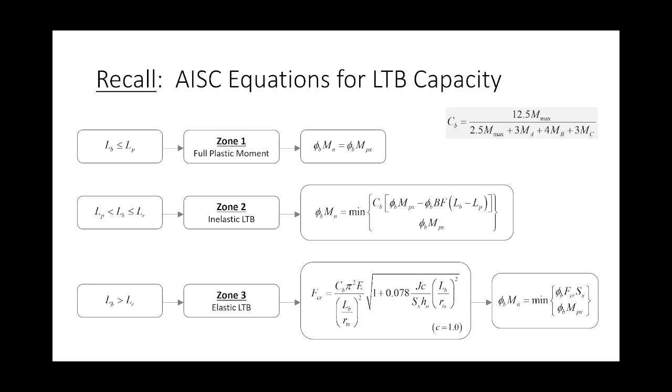But we only considered one. Why? Well, both segments had the same length, both segments had the same max moment, both segments had the same CB, right? So they performed the same way. With me so far? Now I want to talk about this problem, just to make sure that you're paying attention.

What about a beam like this? So each segment might have a different LB value. Each segment has a different CB value. Each segment has a different Mmax. So I propose that each of these segments is going to have a different capacity, different phi Mn.

So the way that you would handle this as an engineer is you would look at all of them. You would compute the Mmax for this segment, compare it to its phi Mn, the Mmax here, compare it to its phi Mn, and the Mmax here, compare it to this phi Mn. And the segment that governs is the one that has the largest efficiency, or the largest performance ratio, as we looked in our last example.

Now for shears, you just use the maximum shear overall, and for deflections, just use the maximum deflection across the entire beam. I just want you to know that the problem we did last time was simple because both segments were the same, and to be honest, we try and exploit symmetry whenever we can in real-life applications.

But it's possible that you don't have symmetry, in which case, take the one that has the largest efficiency. And the one that has the largest efficiency might not be the one that has the largest moment on it. In other words, you might plot the shear and moment diagram, and you might have a segment that has a lower moment than another, but the efficiency is higher because of the CB and the capacity and whatnot. Does that make sense? All right, I want to look at this problem.

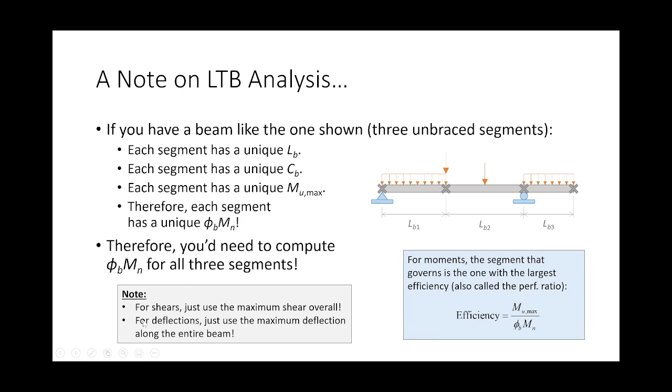Okay, and before we open up the calculations here, I'll open up the notebook, but I want to make a point. Let me go to the notebook here so that you all can see this. I made a note here for this problem that a W14 by 61 is not one of the bold rows in Table 3-2. It's not.

There is a reason why we're looking at a section that's not a bold row. That doesn't make a lot of sense now. It will later. Okay? But suffice it to say that your most economical design for a given problem might not be a bold row in Table 3-2. So just be forewarned that that can happen. Okay? Everybody good so far?

Now, what I want somebody to do is find the W14 by 61 and help me out with something. What the? I don't know what happened there.

I want you to tell me what LP and LR are for a W14 by 61. It's in Table 3-2. I'm not saying it's not there. It's there, it's just not one of the bold rows.

All right, I want to make sure everybody can find it, because everybody brought their AISC 15th edition steel construction manual with them, right? You're giving me this look, you know.

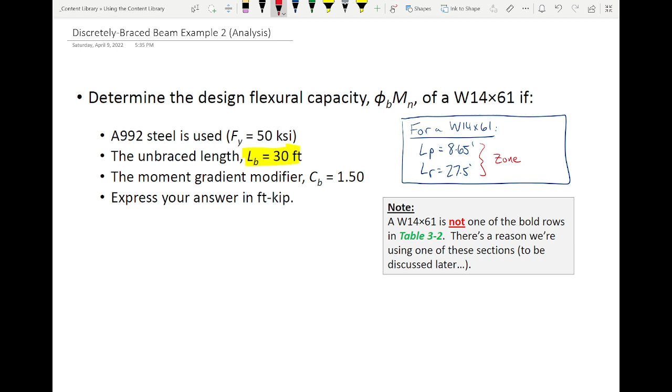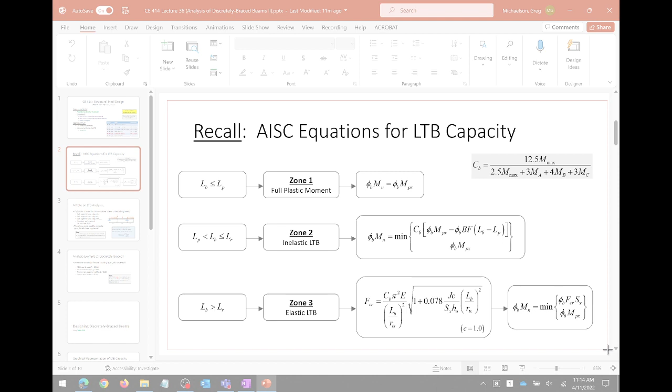Well, hold on, let's make sure we all know what we're doing here. Zone 3. All right, so here's what we're doing. Here, I'll screen clip this so we have it in our notes.

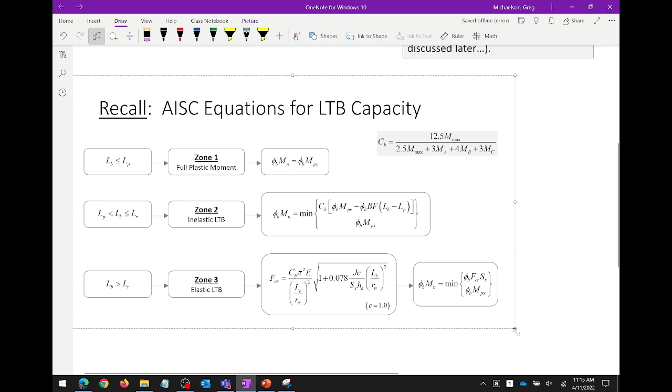So here's our model for capacity, right? And we determine what zone we're in by comparing LP and LR to our unbraced length. And we're in zone 3 because our unbraced length was given as 30 feet, and LR was given as 27.8 feet. Is that right? So that's why we're in zone 3. Okay, with me so far?

I want to stop and make sure we're clear on why we're in zone 3, because there's a couple people giving me a look like, what are you doing? Everybody good?

Okay, now let's look at this equation. This is the first thing we have to compute. It looks nasty, it's really not. It's just a lot of plug and chug, okay?

So let's look at the values we need and what values we're missing. Do we know CB? Were we given CB at the beginning of the problem? It's 1.5. I think we've seen this number before, it's like 3.14 something, right? Pi. We know E. LB is our unbraced length, which is 30 feet, okay.

We need to be careful with the units here, okay? Because RTS is not going to be in feet, it's going to be in inches. We don't have RTS, but that's something we can look up, okay.

All right, 1 plus 0.078. Okay, now let's look here. We have JC over SXH naught. We need to look up all of these except for C, because we're given C is 1. C is always 1 for I shapes.

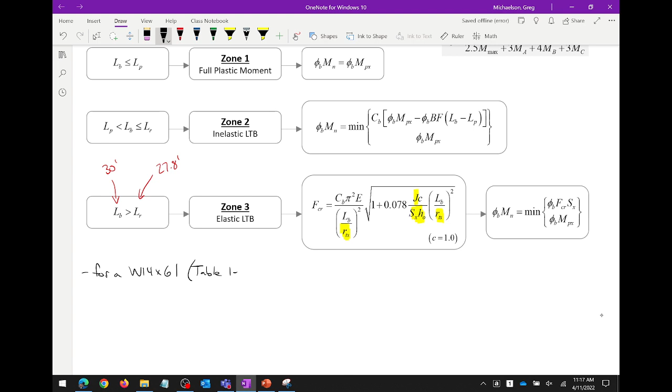So for a W14 by 61, we can go back to Table 1-1, okay, we're going to need some values. Specifically, what we're going to need is the following, skip ahead a little bit.

We're going to need SX. We're going to need RTS. We're going to need H naught. And we're going to need J. Those are the values we're going to need. So for a W14 by 61, what are these values?

Unfortunately, with zone 3, there's no real handy shortcut, like we just have to work our way through it. So what's SX for a W14 by 61?

92.1. Wait, what? All right, so 92.1 cubic inches.

RTS. H naught. Now H naught is just a little shy of the depth, because it's the distance from the center of the flange to the center of the flange. So it's just a tad shy of the depth. There we go.

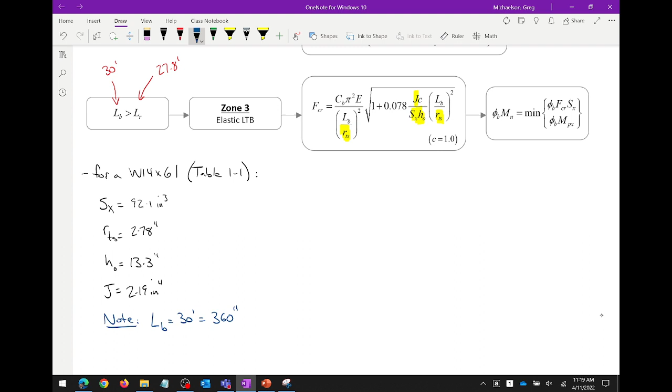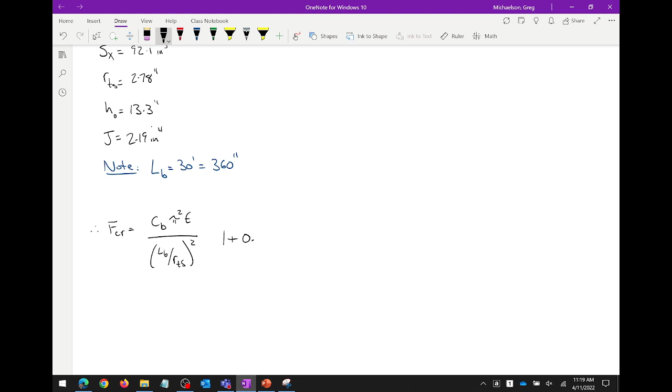I think this probably takes the record for the longest equation in this class that you actually have to use. So, FCR is CB pi squared E over LB over RTS, and that quantity squared, that's like a slenderness squared, and then 1 plus 0.078, we have a fraction, then we have our slenderness squared, and we take the square root of all of that.

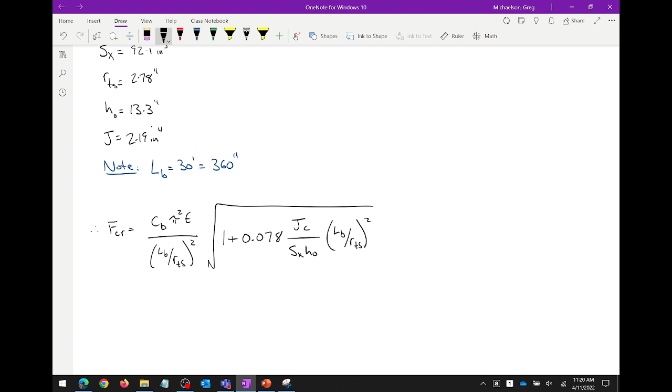Again, I know it's kind of nasty, but that's our expression. Fortunately, everything that goes into this expression is very plug and chug. So I'm going to raise this up a little bit. We have 1.5, we were given CB, we've got pi squared, we've got 29,000 KSI.

Now, what's interesting is I actually want you to pay attention to E in this equation. There's a reason I want you to pay attention to it, and you'll see why here in a bit. 2.78. Don't forget to square your slenderness.

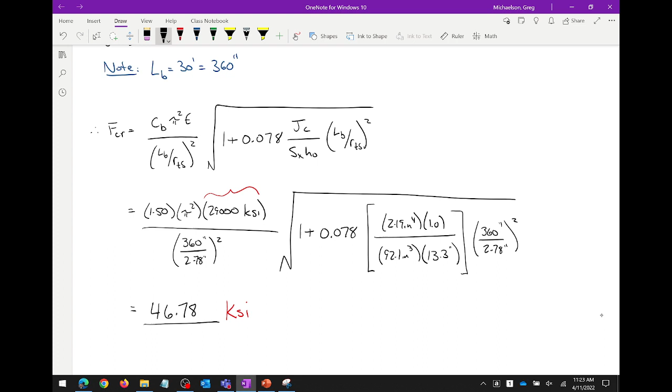Like, burn. All right, did everybody say 46.78? Everybody good on that? Okay, I would make sure that you are comfortable with that. All right, now if you are with that, let's let's do some calcs.

Phi B, FCR, SX. Now everybody pay attention. Phi B, phi is our resistance factor, which is 0.9, 46.78 KSI. What was SX again? 92.1.

What are the units going to be as a result of this computation? We're computing a moment. No, that's KSI, that's cubic inches, it's going to be in inch kips. If I want it in foot kips, if I want the answer in foot kips,

I need to throw my unit conversion in there. So that's what I say, I want everybody to pay attention. You got to do that, okay? So what do we get for this? 323.1 foot kip. Do I have a second on that?

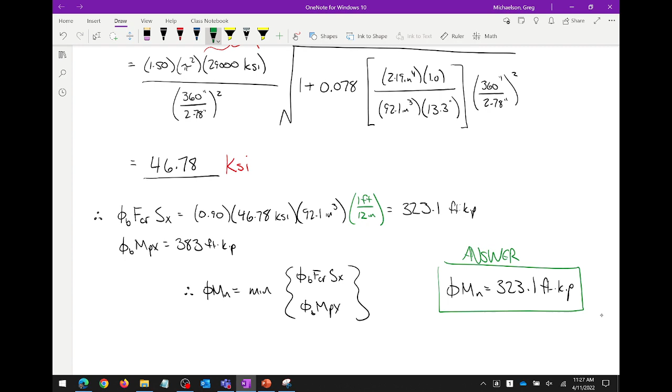All right, I'm going to take a step back, make sure we're all clear with what we did here. I know this formula was kind of nasty, but it's pretty methodical and procedural. We're just going to our flow chart, saying okay, we're in zone 3, plug and chug. So you can see what I did here - Phi mn is the minimum of that or that. You just got to make sure you're careful with your units.

With me so far? Yes. I have one question about how it says JC - where does the C come from? It was 1 in this case, but... That's a great question. So C is an adjustment for if we're not dealing with an I-beam. If we are dealing with an I-beam, there's a pretty plug and chug expression.

If you open your manual and turn to chapter F, it's in - hold on, give me a sec - so it's 16.1, we're back in the spec, 16.1-48, it's on the bottom left. So chapter F is the chapter that has all these expressions for LP and LR and all that stuff. If you look at the bottom, you'll see where it is.

Yes, that's a great question. The short answer is yes. Here's the longer answer: these equations kind of break down when you're going outside that. If you don't believe me, just look at how chapter F is organized in general - if you go to the beginning, there are sections for angles, sections for HSS, sections for this. Bending's hard, right? So sometimes these nice, pretty expressions don't work for angles or other shapes, and when they don't, that's what this is for - there are different expressions that do work. Now, the reason I'm only showing you this is because this is steel design, and 90% of all elements we bend are I-beams. So that's why we're using this. Does that make sense? That's a great question.

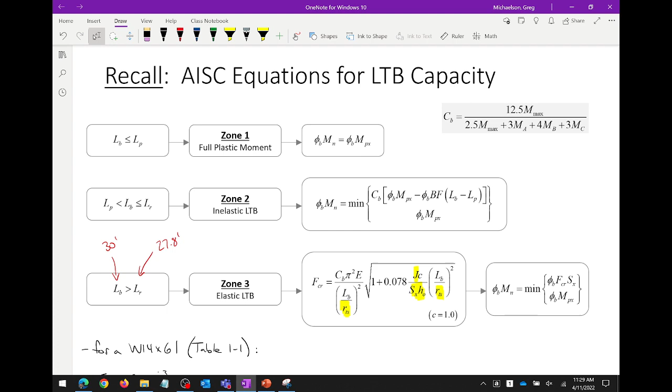All right, any questions? All right, I want your eyeballs up here for what we're about to do. Let's talk about designing. Now, design is about selecting shapes to adequately resist loads. Now I want to go back to column land and make sure everybody remembers this.

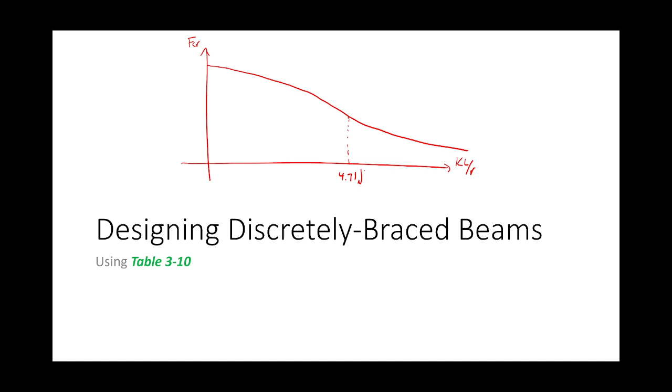Okay, so we put KL over R here, we put F critical here, and we had this curve that kind of looks something like that. We had this dividing line here that was 4.71 square root of E over Fy. And we had this - 0.658 raised to the Fy over Fe, times Fy - and this was 0.877 Fe. And what was Fe, by the way? Fe was pi squared E over KL over R squared. I think it's because I hit the cord - sorry about that. All right, this was our column curve, our AISC column capacity curve.

So if I wanted to plot the actual curve for a given column, how many properties do I need for that column? To give you an analogy, we just did an LTB problem where we needed SX, we needed H0, we needed RTS, we needed J. How many properties do you need for a column? You just need one, right? And that's R - you can plot the whole curve with just R. With me so far?

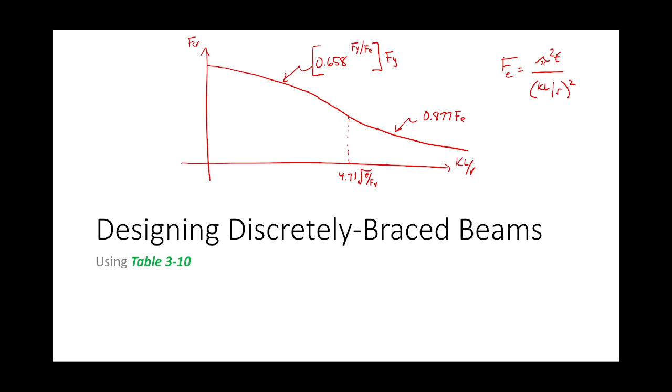The problem is when we look at the beam curves, it's just nastier, right? There's just a lot more - we need RTSs and SXs and ZX and this and that. There's just too many parameters that go into the construction of a given LTB curve for a single beam. Do you remember when we first started looking at this curve and I showed you that little spreadsheet that worked for a W24 by 76? Y'all remember that? I was changing the CB values, and you saw what the curve did. Well, if I said no, this isn't a W24 by 76, let's change it to a W30 by 90 - completely different curve. There's just too many parameters that go into it - different LPs, different LRs, etc. There's too many parameters in one curve, so how do we design?

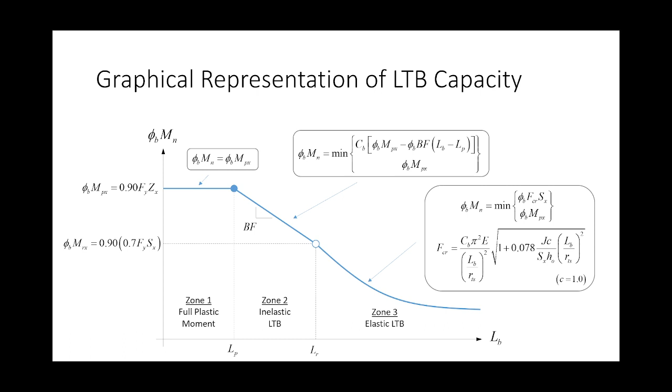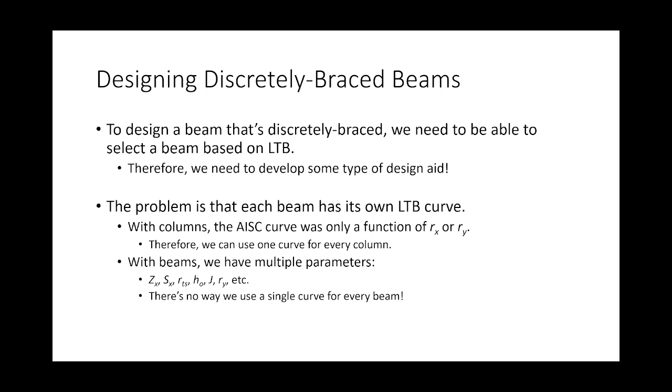Well, we need some design aid. Unfortunately, we cannot use a single curve because each beam has its own curve. So what do we do? We plot them all, okay? Now, I can already see the looks on some of your faces, and you go, what? This is crazy. This is a lot easier than it seems, and I'll show you.

Now, a couple things. I want everybody to turn to this. Open your AISC 15th edition steel construction manuals that you all brought with you to table 3-10, because I want you to kind of see this. All right?

Let's go back to this. So what do we have? We have LB plotted on the x-axis, we have phi-mn plotted on the y. Unbraced length plotted on the x-axis, phi-mn plotted on the y. And you can kind of see what's going on, because here's that, then it goes down, and then it's going to turn into the hyperbola a little later.

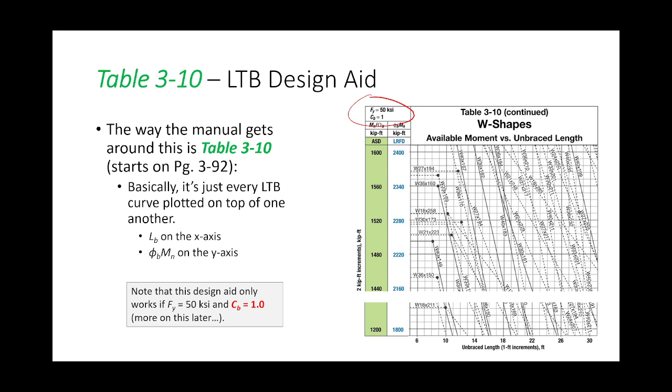Now, a couple things to pay attention to is this right here, this little top corner. This is really important. This top corner says that this guide only works if Fy is 50 KSI and Cb is 1. Obviously, we know Cb doesn't always equal 1, so we got to work our way around that. We got to figure out how to deal with that. We will, don't worry.

Now, eyes up here. I got some animations, some nifty little graphics that are going to show up. Here's how this table works.

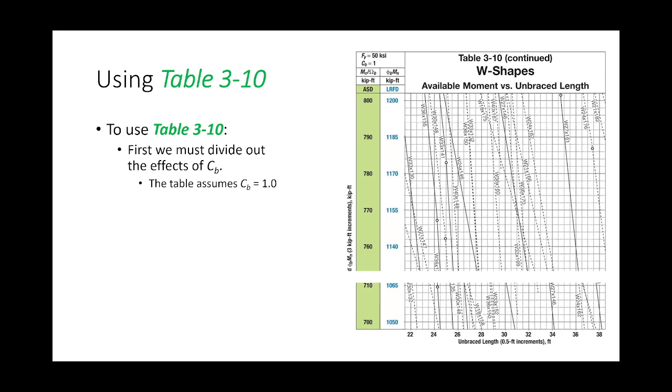First, we have to divide out the effects of Cb. So what that means is we do some structural analysis. We have a segment, it's got a maximum moment, it has a Cb value. We go into this table with Mu divided by Cb, so we divide out the effects of Cb so that we're entering the table sort of assuming Cb equals 1. And so what we do is we look for the point in the table where on the x-axis we have our unbraced length, and on the y-axis we have our moment — in this case, our factored moment on the beam divided by Cb.

And we look up and to the right for the first shape that's a solid line. So watch this, let's do a quick example. Let's say that LB is 28 feet, and let's say that Mu over Cb is this value. So everybody watch this, find that point. You missed it, right? Let me do it again. You find that point, okay? Now there's that point, that's the point that corresponds to the problem I'm doing.

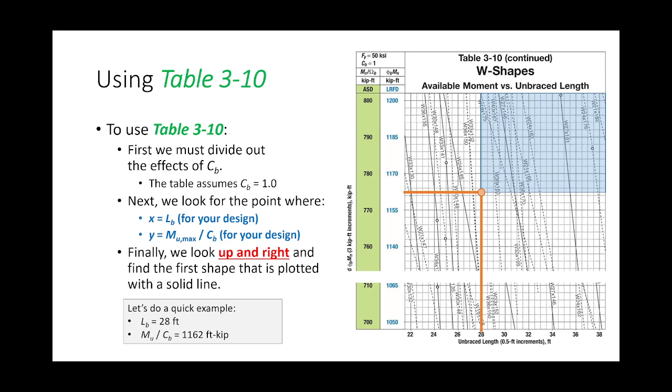So keep watching, okay? Now I propose that everything in that blue shaded region is a valid design, or a valid choice. Why that region? Well, that region corresponds to beams that either have a longer unbraced length or can hold up more moment. And so what I'm going to do is look up to the right and find the first solid line shape. That shape is a W27 by 146, and that's what I'm going to try, okay?

Now, there's probably a natural question. Why are some lines dotted and some lines solid? Well, why in table 3-2 were some lines normal and some lines bolded? Why were those top rows bolded?

They were the most economical shape within a given region. The solid line curves are the most economical shapes within that region.

Because of the nature of the curve, these solid shapes might not necessarily correspond to a bolded row in table 3-2. That's why the example we just did today was not one of the bold rows in table 3-2. Does that make sense? Okay.

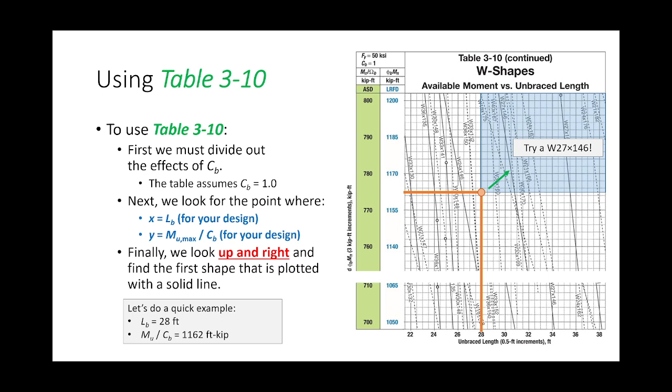Now, you all have manuals because everybody brought their AISC 15th edition steel construction manual with them, obviously. We're going to make sure that we're comfortable with this. So I want everybody to help me out.

I want you to find the solid line section corresponding to an unbraced length of 14 feet and a moment of 2150 foot-kips. Right now.

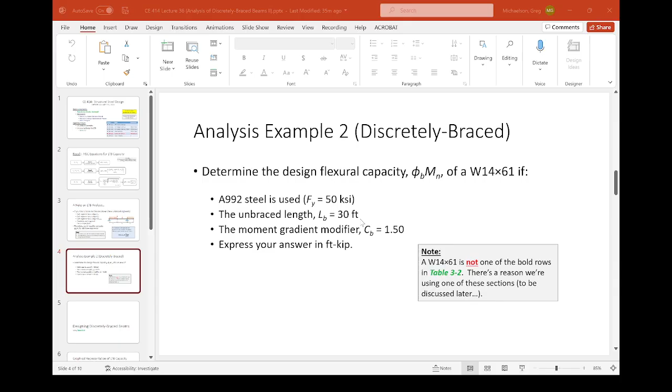First off, let's agree what page are we on? 3-99, okay? So hold on, let's see. All right, let's try something. Let's see if this works. All right. 3-99, you said? Hold on.

Okay, so let's see. We're looking at this. So you're on this page right here. So let's see if we can snip this and put this into our notebook.

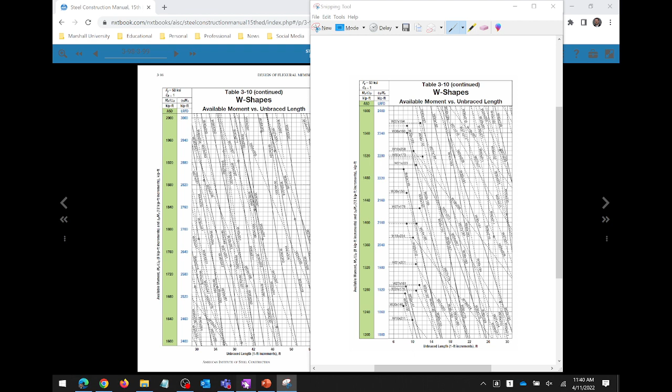I'm telling you, this does not like numbers. Yeah, I think I'm getting rid of this. I'm getting rid of this notebook or this little keyboard after the semester's over.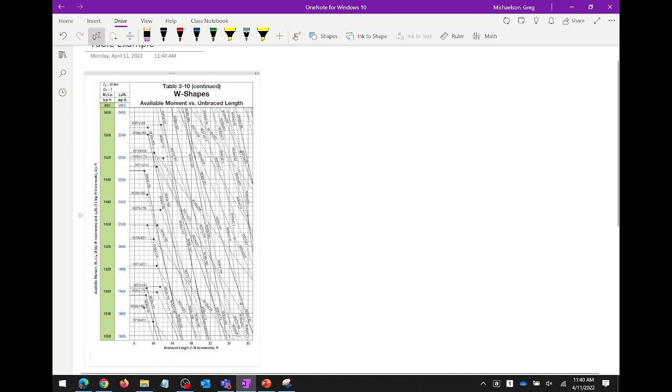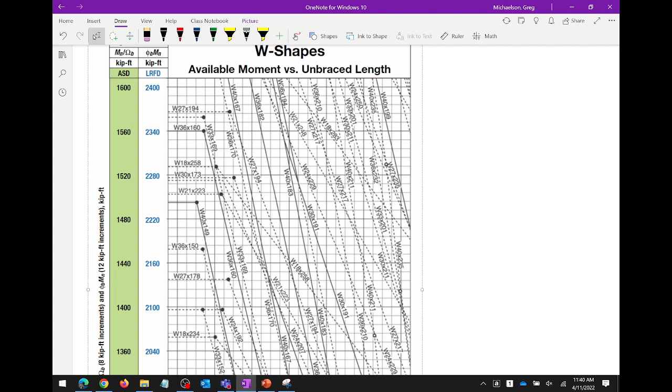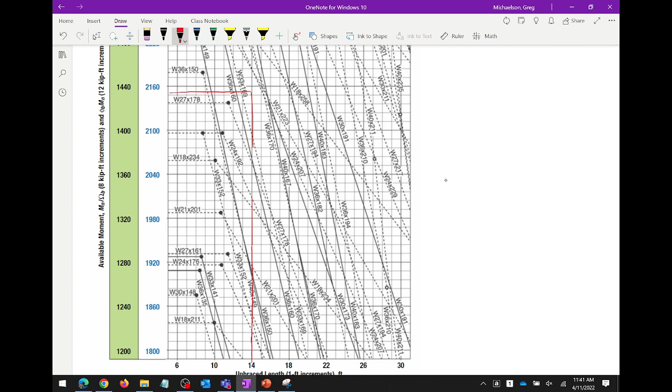Okay, so here's the table that everybody's looking at, and we're going to use an L_b of 14 feet. So that's this line right here. What was the moment again? 2150. So 12 kips, that's something about like that. So we're on, that's the point, right? That's the one that we're using, right?

And so anything here, anything in this upper region will work. So I go up and to the right, and that's the first shape that I pick, is this one. And so I look up, and I'm getting this label right here. This is the, that's the label.

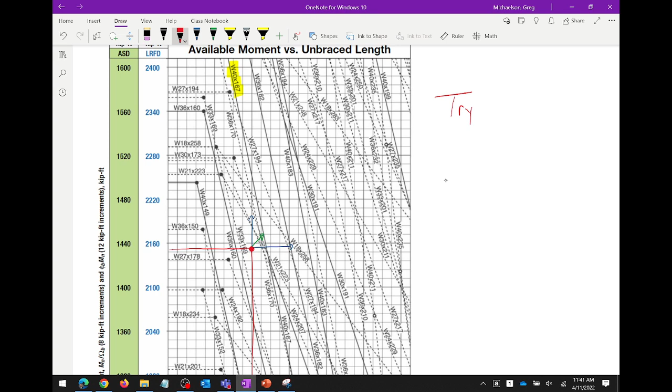So try a W40 by 167. And I'm just curious. Okay, that is a bold row. That is a bold row. Sometimes it is, sometimes it isn't. It just depends, okay? Does that make sense?

So this is just some quick practice with table 3-10. Now, if you remember, I said that there were going to be 2 days of beam design examples, and I said that the 2 cases are what I'm calling low Cb values and what I'm calling high Cb values.

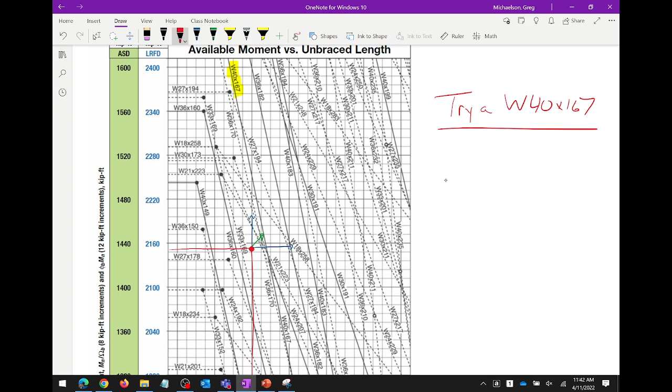I remember that. So the difference is that when you have a really, really high Cb value, it can cause you to have to go back to this table quite a bit. There's a lot of page flipping with high Cb values as opposed to low Cb values. And I don't want to get too far down the rabbit hole with that because I kind of want to make sure that we understand the process. All right, so everybody with me so far?

Does everybody understand what we did today? Now, my goal for today was to finish the LTB examples, the analysis examples, right? So we've actually done 2 examples for analyzing a beam, right? We did one that was in zone 2, one that was in zone 3, right?

Your homework assignment due Wednesday is an analysis assignment. Starting Wednesday, we're going to do design. And so we're not using it. This is not a requirement for your homework due Wednesday. I want this part to kind of seep in about how to use this. I don't want you to be scared about this. It's not scary. It's actually really useful and really simple to use. It looks like a nightmare, but it really isn't, okay?